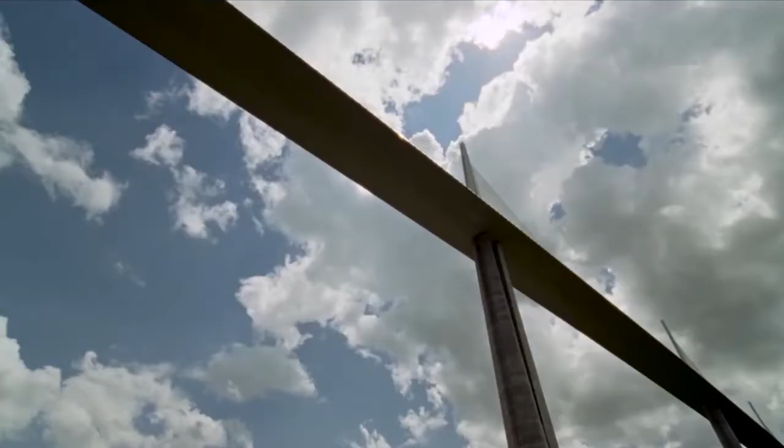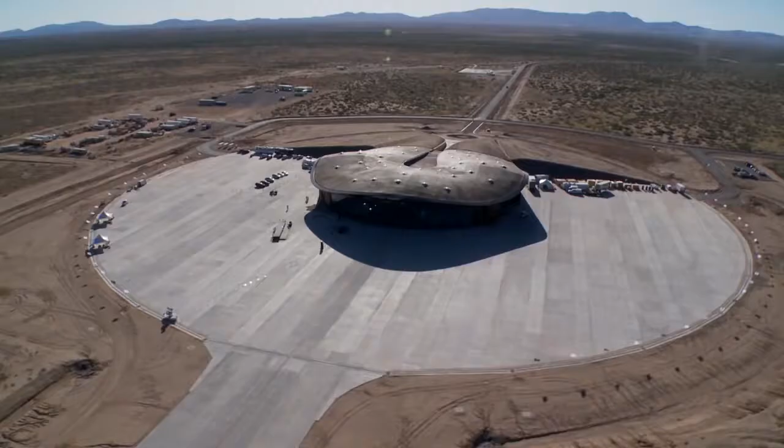So he said, you're a pilot, you know about sailplanes, you know about helicopters, you've flown fixed wing, and also you've designed airports. There is no thinker in the world, I think, who understands the relationship between sky and ground and sky as profoundly as Norman does. I mean, invented the modern airports, built the first spaceport, and now having built the largest airport in the world, mischievously I said, Norman, look, you've built the biggest airport in the world, just come and build the smallest.

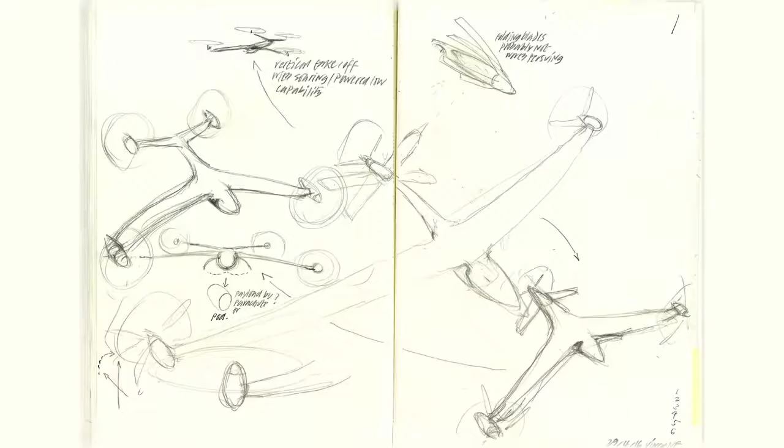And so that was really the start of a conversation. And Jonathan explained this kind of convergence of the most dynamic, futuristic technology of the drone associated with the military, but here in a humanitarian concept, that it could deliver blood, it could deliver cargo, particularly in Africa. And so he described how it could leapfrog infrastructure, countries which don't have a network of road and rail.

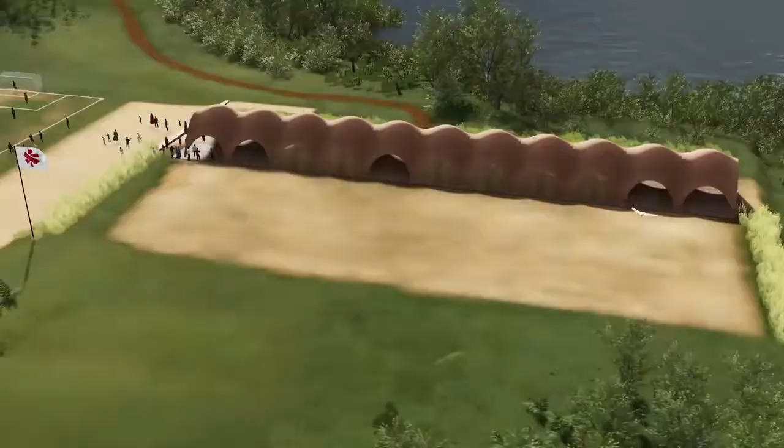I'm an Africanist and I'm interested in emerging economies. And we look at what is going to happen in those economies in the next 10 years. They don't have an industrial base. So these towns, which now have 20, 40, 50,000 people, will end up with 200,000, 1 million people, with 70% youth unemployment. By 2025, 2030, most of those towns will have a drone port, which are connected in a network system to other towns.

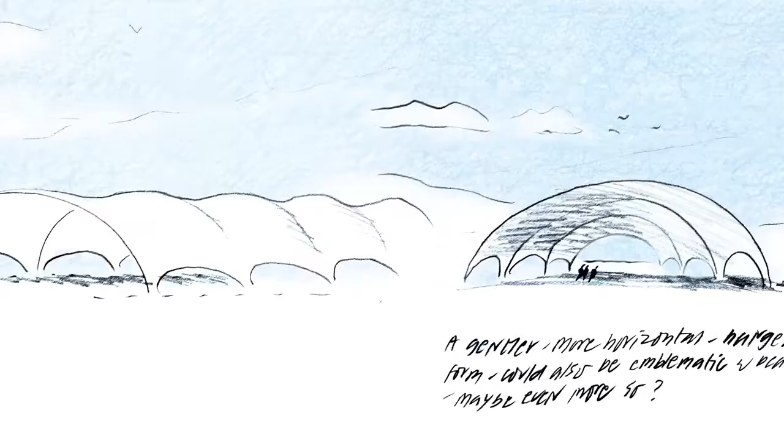So got tremendously excited about this, shared it with colleagues, Narinder, structural engineer, Roger, and out of that came the idea of a modular building system that would be capable of being constructed by communities.

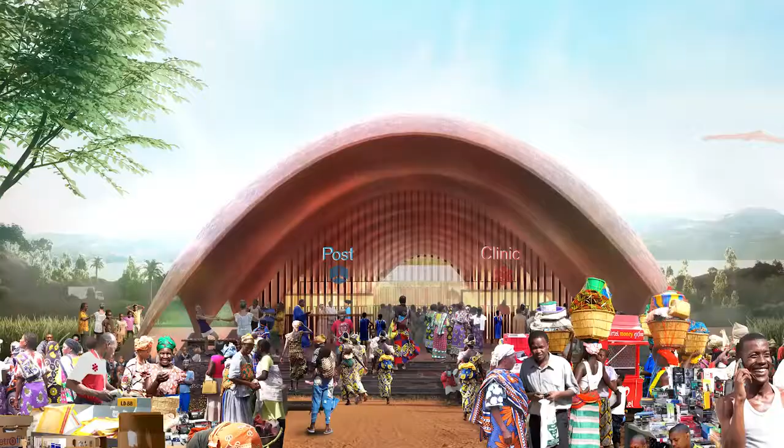One of our first questions to Jonathan and talking about drone ports was, do you actually need a building? Don't you just need a truck or a series of shipping containers with the equipment inside? And we quickly realized that drones, particularly in Africa, need a hub, need a place where they can be built, the technology could be advanced, and as that technology advances around the drone itself, the building can advance and evolve at the same time.

So imagine the beautiful green, lush landscape of Africa with a brick that has naturally come from the ground and has a buoyancy because of the structural form, a buoyancy that's lifted it through above the greenery. So you're left with something very beautiful and symbolic on the landscape.

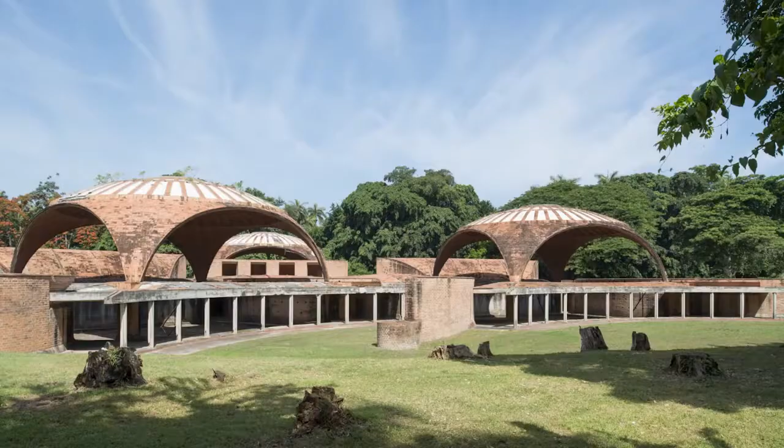The idea for the drone port arose through discussions with Norman, with Jonathan, with Narinder, and it was to take a form that we know and has existed for a long time, the shell, and make it specific to the brief of the drone port. So our response is a modular response. It can be built and extended. It can be made in different areas.

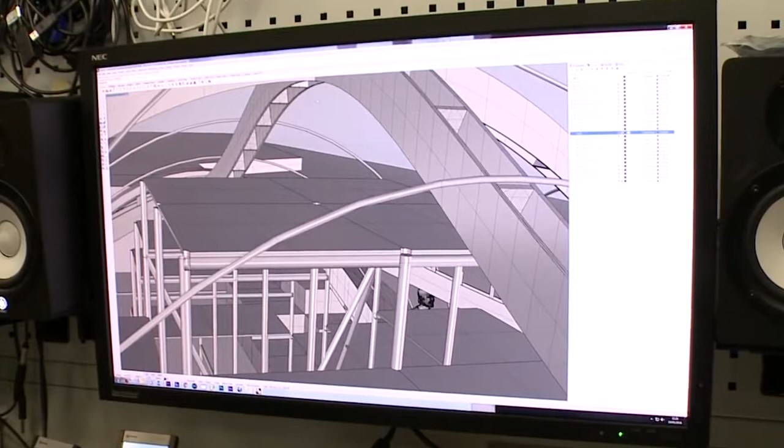What we can bring is the knowledge of the geometry that is required and the ability to deal with particular effects such as seismic forces, earthquake forces. The big question then, an early design concept, is how do you translate that into reality? So my foundation was able to harness the energy, the enthusiasm, the idealism of university students and their professors. So we're looking at MIT in America, the Polytechnic University in Madrid, ETH in Zurich, EPFL in Lausanne.

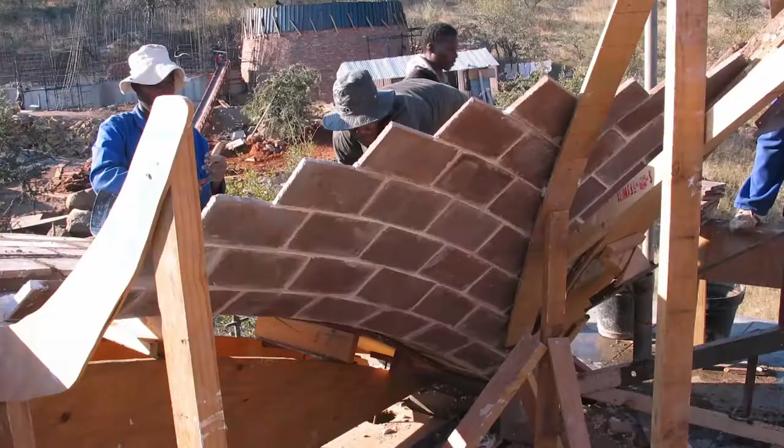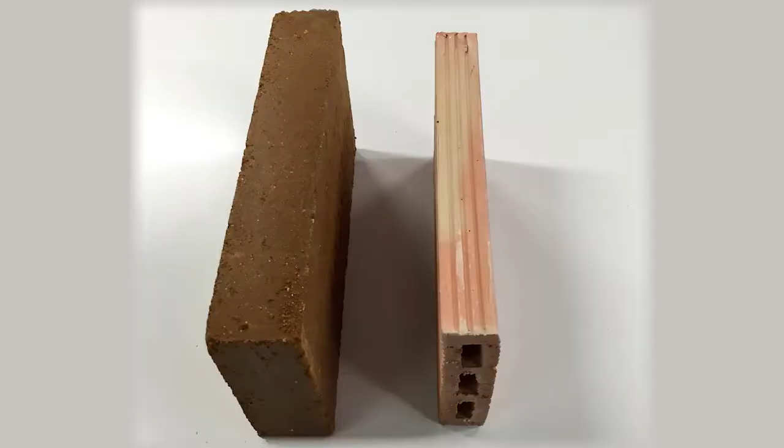The drone ports will be constructed with local materials using local labor. The goal is to maximize the use of local resources in the community. The low-tech structure is made of earthen bricks, thin tiles of compressed soil, built using a 600-year-old technique which can be constructed with minimal support during construction and has no steel.

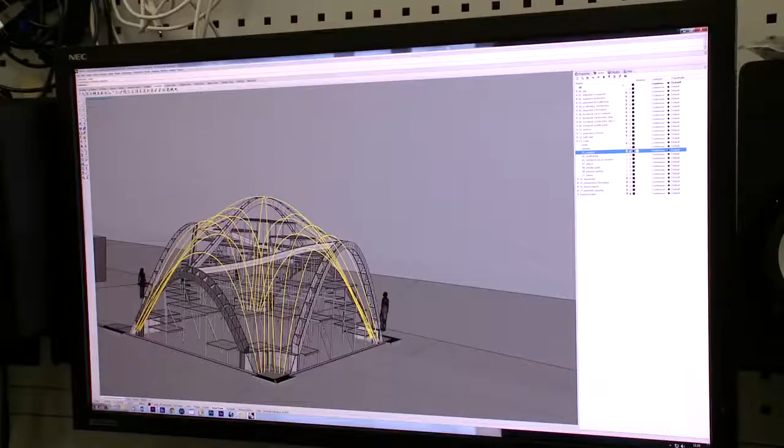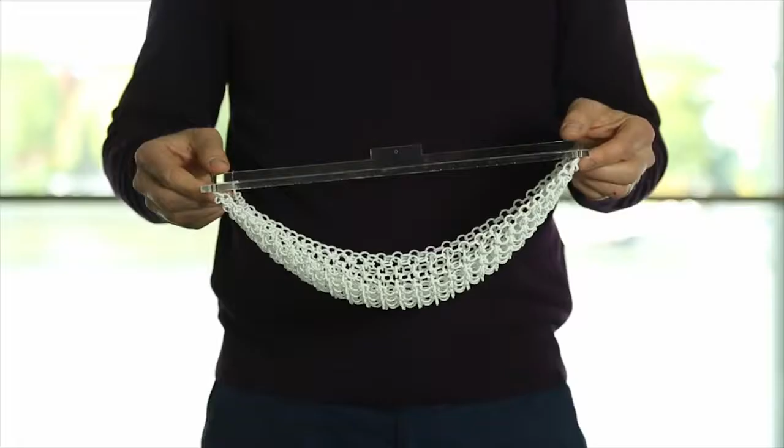The vault was created using RhinoVAULT, which is a program developed by Philippe Block and his Block Research Group, who's one of the founding partners of ODB Engineering, which is the firm that is collaborating with Foster on this project. So the geometry is somewhat form-found, using structural parameters to create an optimized geometry.

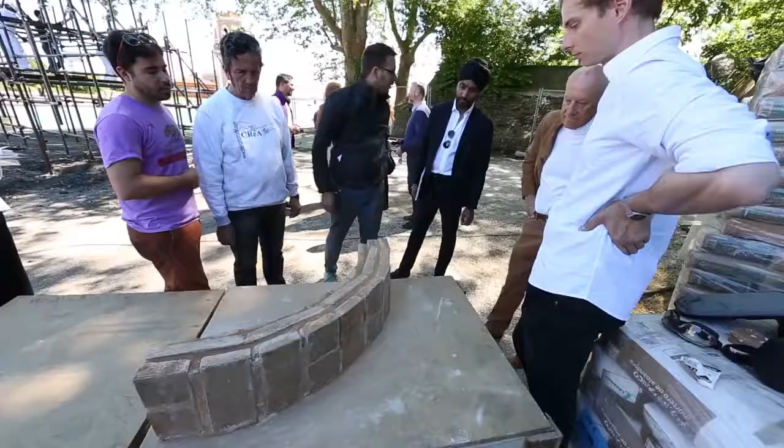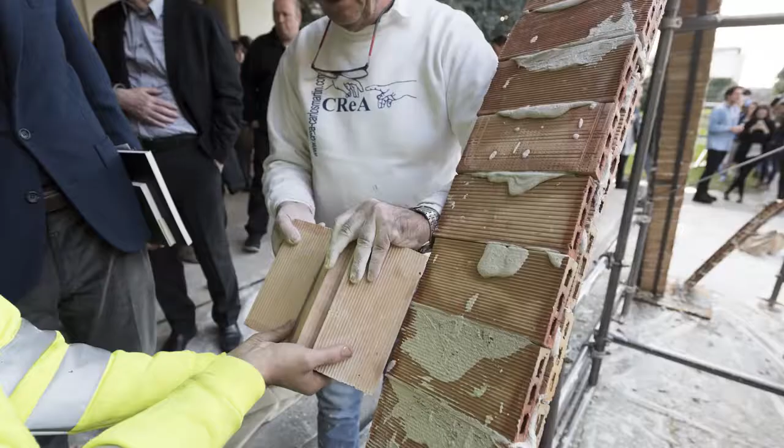Bringing these together and then bringing in industry with another foundation, the LafargeHolcim Foundation. So in the case of LafargeHolcim, it meant redeveloping a product that already existed. Durabric is a building brick that exists for building predominantly affordable housing in emerging countries. And it was a matter of reshaping it, making a tile, actually more than a brick, that has at least as good properties as the brick itself, so that it really works.

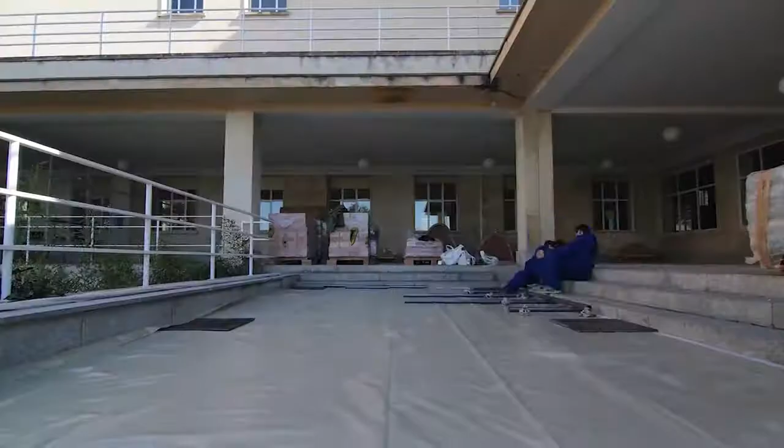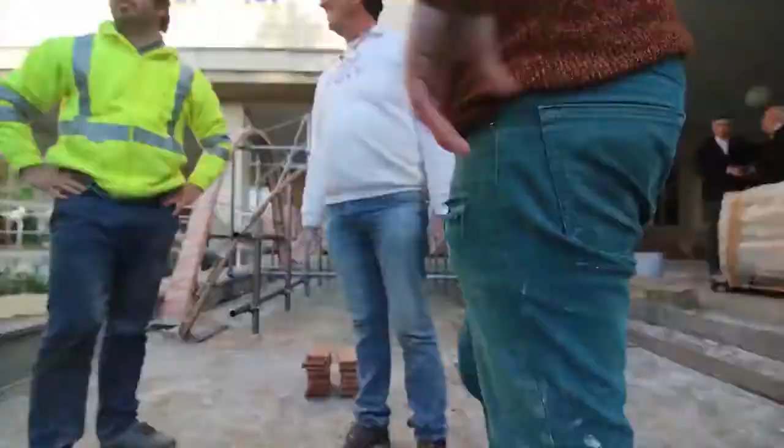And out of this is just a great story, because the foundation was able to bring all these different parties together and to use the Venice Biennale as a showcase, as a demonstration of a group building a typical module, and its creation being filmed becomes the manual for those more remote rural communities. So when you see this vault emerging in the Arsenale in Venice, you realize that its coloration is the same as the historic buildings around it.

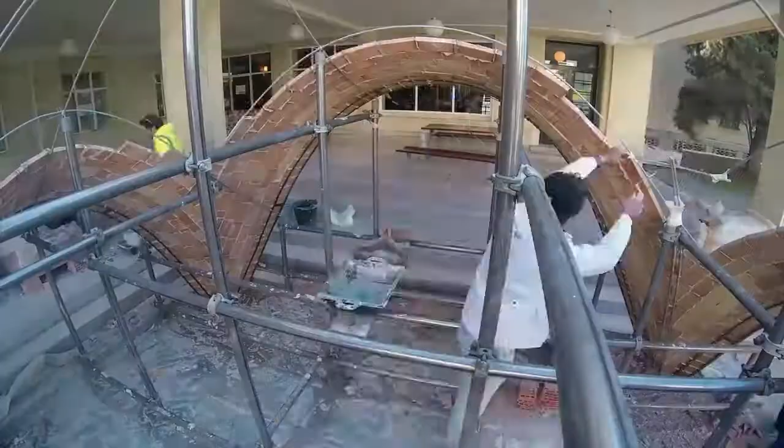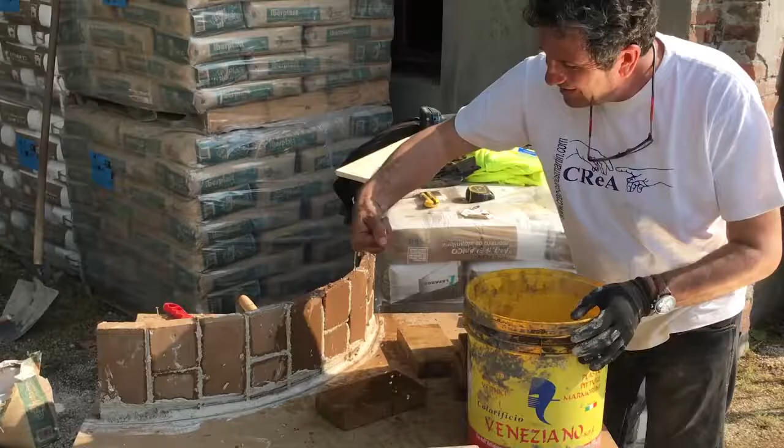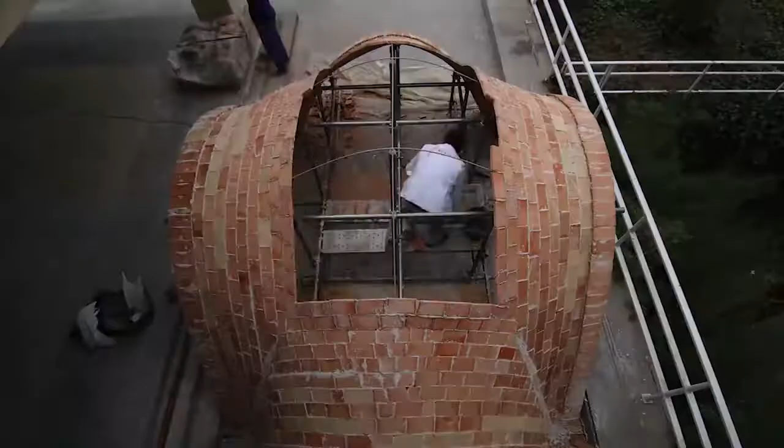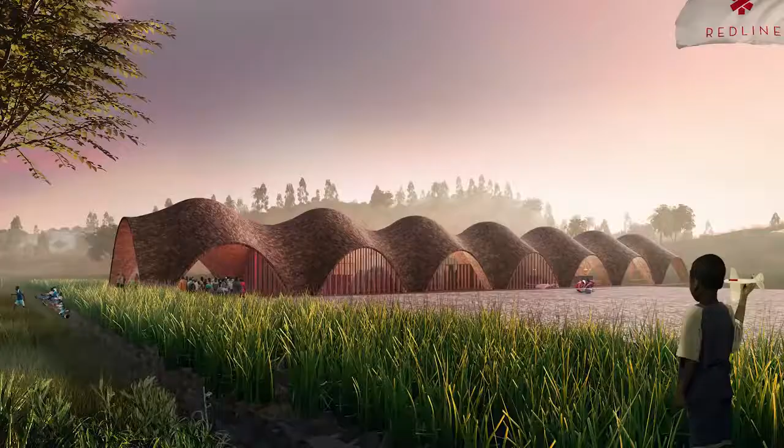So if it's capable of being built under the leadership of a master mason, but essentially by students, then you realize that it can be recreated across emerging economies. And being a self-build, the minimum products are transported and the maximum engagement of the local community. So it starts with the idea of a drone port, but the drone port goes beyond it. It's like a catalyst for other industries, education, marketplace, community centers. So it's a very, very wide application.